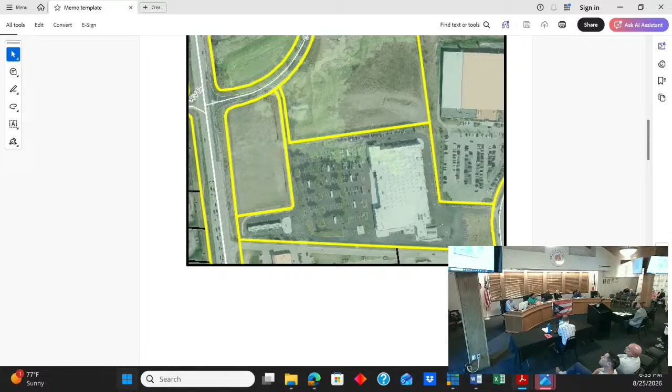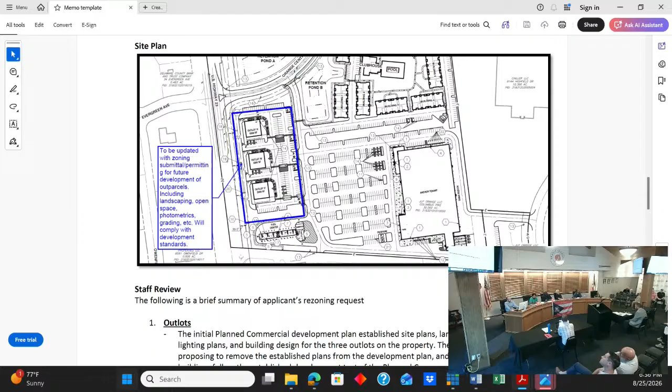And then the site plan provided by the applicant. You can see the BJ's Wholesale Club on the right side of the screen. The commercial outlots that we're discussing are highlighted there in blue. The initial planned commercial development plan, as approved, established site plans, landscaping plans, lighting plans, and building design for those 3 outlots on the property.

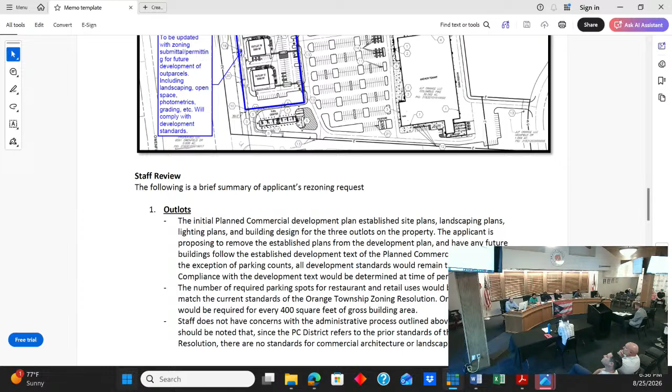The applicant is proposing to remove the established plans from the development plan and have any future buildings follow the established development text of the planned commercial district. With the exception of parking counts, all development standards would remain the same. It would just be removing the building designs which were submitted as pre-approved, basically allowing them to be flexible so they could be redesigned at the time of permit.

There is one change: the number of required parking spots for restaurant and retail uses would be updated to match the current standards of the Orange Township zoning resolution. They were different at the time this was initially approved in 2022. So the new parking count for the outparcels would be 1 parking space required for every 400 square feet of gross building area.

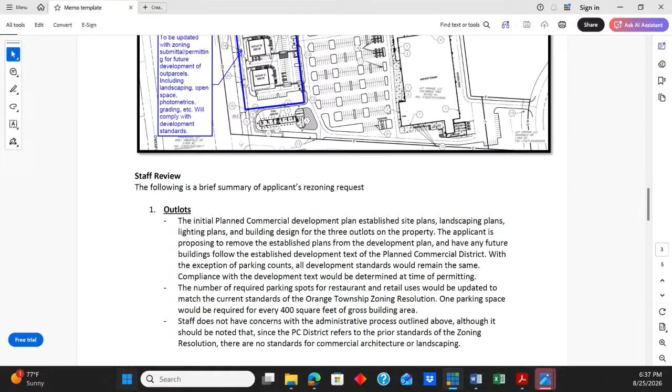Staff does not have concerns with the administrative process outlined above, although it should be noted that since the PC district refers to the prior standards of the zoning resolution, there would be no standards for the commercial architecture or landscaping. Lighting would be included in the planned commercial district, but the architecture and landscaping would not be governed by it.

The other aspect of the amendment application is for signage, so bear with me as there are some diagrams that show this maybe a little bit better than what my text allows. There's currently 1 monument sign existing on the site, which advertises BJ's Wholesale Club and the fuel station.

A divergence was granted at the time of rezoning in 2022 for that sign to be 10 feet in height instead of the standard 8 feet. 3 additional monument signs were approved at the time of rezoning for the 3 outlot parcels, but those signs have not been built since the outlots have not been developed. A divergence was granted at that time to allow multiple monument signs on the property.

In May of 2024, the Orange Township Board of Appeals approved variances for 2 directional signs on the site, allowing them to be 15 square feet in area and 6 feet in height. The applicant is proposing to alter the permitted signage on the site to allow for 2 new monument signs, meaning the current monument sign would be removed and the 3 proposed standalone outlot monument signs would be removed from the plan. So there's 1 existing, 3 proposed as it is currently. The revised plan would have 2 in total, removing the 1 that exists today.

One monument sign, labeled MS2 in the plans, would be located along the frontage of US 23 in a similar location to the currently existing monument sign, with encompass signage for 3 outlot parcels, as well as BJ's and the fuel station. That sign is proposed to be 20 feet in height, which would be a divergence from the zoning resolution, because the maximum permitted height for monument signs is 8 feet.

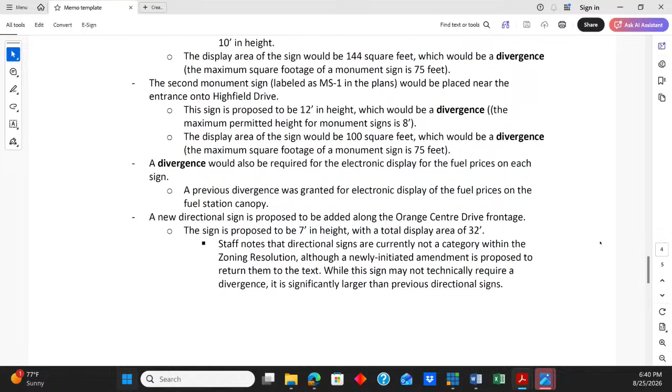One more sign is proposed—a new directional sign to be added along the Orange Centre Drive frontage. That sign is proposed to be 7 feet in height with a total display area of 32 square feet. We note that directional signs are not currently a category within the zoning resolution, though we may look to update that with future zoning amendments. While the sign may not technically require a divergence, it is significantly larger than previous directional signs.

You can see on the screen there—we have this graphic in a larger form we can put up in a minute. The sign on the left is the currently existing monument sign, 10 feet in height. The two in the center and right would be new construction.

The one in the center would be located near the entrance onto Highfield Drive, at 12 feet in height. MS2 on the right would be new construction proposed along US 23, at 20 feet high.

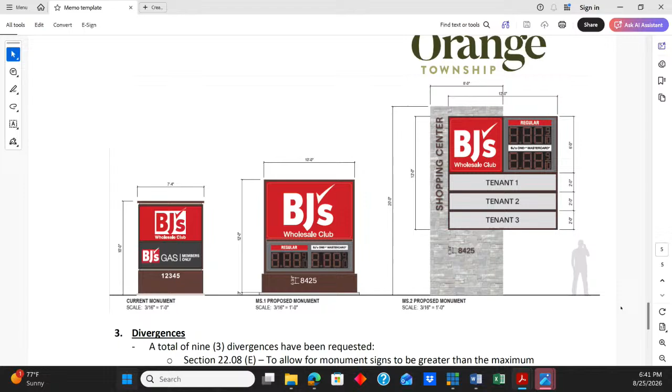So, a total of 3 divergences for the sign heights to allow for the monument signs to have larger display area, and then to permit the electronic display of fuel prices on the sign.

Because this is an amendment to an existing planned district, the Delaware County Regional Planning Commission is not required or requested to review this application. So this is the first and only hearing for this at the zoning commission level. This would then proceed to the township trustees.

That's all I have for the moment. With the applicants here, does the commission have any questions? Would you like to make a presentation about what your changes are?

Yeah, is this working? Yes. Okay, thank you for allowing me to come in and speak to you today about this development.

This is something that, as was mentioned—thank you for the staff's report—has been in development for a number of years, trying to get anchor tenants involved, which thankfully BJ's was able to come in and utilize this land. But there are some new faces here from when we came in a number of years ago, and I think it would be beneficial to talk through some of the hurdles that happened during that time.

Specifically, this land has sat vacant for decades. It was some of the last land located in that area, although it was pretty primed for development given the commercial corridors around it. You had Walmart and Giant Eagle, and you had Meijer, which has now been redeveloped into Floor & Decor. So there are a lot of other outparcels in that area, lots of commercial development, but this land sat vacant, and there are two reasons for that.

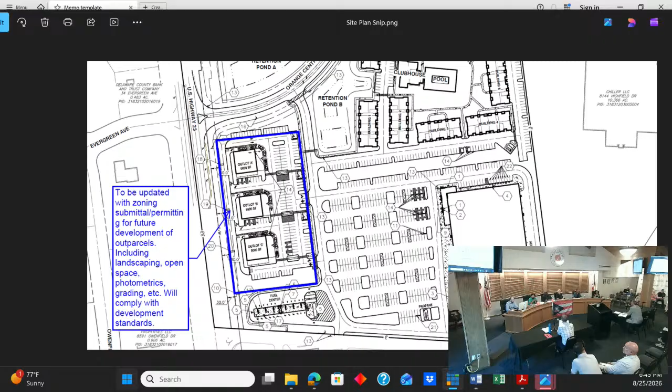The parking that they're requesting for the out parcel, when this was done through a mixed use overlay — there was an overlay district that happened, and I believe it has since gone away — that shoehorned and made this commercial property, which was always dedicated to be commercial, forced it to be mixed use. That's another reason why it hasn't been developed the way it should, because there's a multifamily component on there.

The developers have neglected to do that at this time because they don't feel it's in the best interest of the township. But respectfully, they went through and proceeded with zoning to help get everything approved appropriately. At the time, the parking for the commercial developments and out parcels was something where it was a little bit more of an archaic calculation.

Since post-COVID, as you may know, a lot of restaurants have gone to mobile ordering or mobile pickup, and a lot have gone through drive-throughs now, or just pickup where you don't even order, you just pick up through the drive-through. Our phones post-COVID have really changed things from a socially distant standpoint, and that's changed the whole industry.

With that, at this point in time, we believe, based upon the previous code for that parking, they're over-parked, and it would allow some greater flexibility for those out parcels to be developed, to bring in some new individuals who are not here currently in Orange Township, to help the community if we're able to change it. One of the changes we're asking for on that parking is to go to your current code — just to reduce it to current code so that it allows the flexibility.

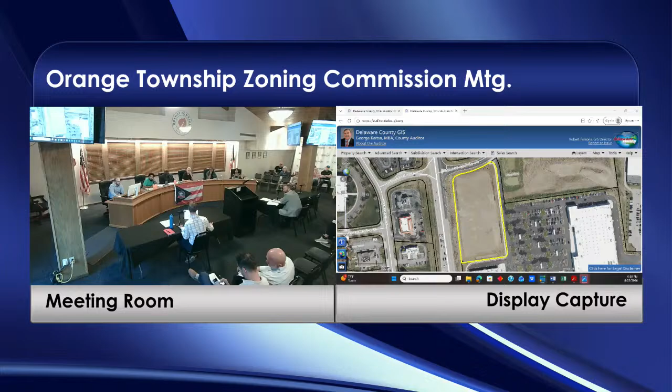Anytime a sign is installed, whether it's a wall sign or freestanding monument sign, it requires a zoning permit. So the zoning department would not approve a zoning permit for any signs that were not these. Right, if we approve this at 20 feet for these 3 out lots, that would be its only sign, no matter what happened. These other separate businesses couldn't apply for another sign because this is your sign.

Correct, and freestanding signs, they could have wall signs, right, on their freestanding sign—sorry, right. That could be restricted.

Correct, that's the plan. Now, there was a mention of, when you compare to the North Point Walmart freestanding sign, how does it compare? Eric, can you go to, it's the second to last page of the PDF?

I couldn't quite fit it in the staff report, but I haven't measured it myself—the applicant provided this measurement, which shows it at 40 feet. Those are shown to scale on that exhibit. You can see it's almost double what we're proposing.

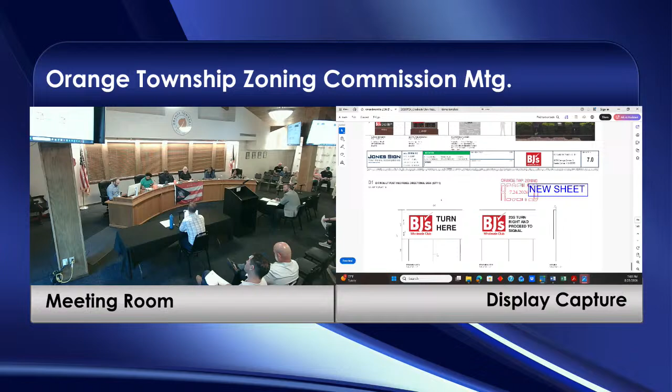To clarify, the directional sign would really not be viewable from 23 itself. Eric, can you pull up the site plan? If you see at the top of the screen where it says retention pond, it's closer to that area.

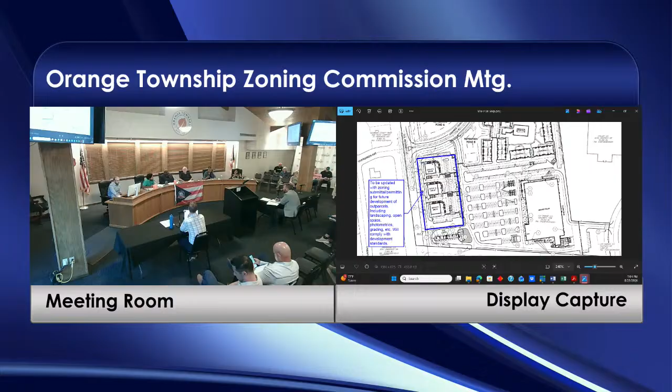We did note in the staff report there are existing directional signs there that have been granted variances in the past. I can imagine them wanting to use the sign they have on the road to direct people, and create one for that purpose. For the directional signs, yes, but currently the one on 23 is going to be torn down. That will be removed and replaced with the one we're proposing.

There have been directional signs installed that are much smaller, only a couple feet in width and height, so they're not very visible, particularly at the speed on 23. That's why we wanted another sign that was a little bit more visible to be seen at that speed.

Are you okay with the sign on Highfield making that our standard zoning, standard dimensions? Robin, are we able to propose that right now, to be able to make that a vote?

I think if the commission is leaning that way, we probably do want to open this up for public comment in case there are any comments from the public. If the commission wants to move that to 8 feet, I would recommend a resolution of approval with modifications, subject to the modification of that sign being reduced to 8 feet.

Put the directional on that. Yeah, so that's something the commission needs to at least have a majority on, regarding the directional. I'm fine with 8 foot, I'm fine with the big change. At the end of the day, you indicated the big change, the big sign, was to get everybody's attention, given that there's nowhere else to turn and no other way to get into the space.

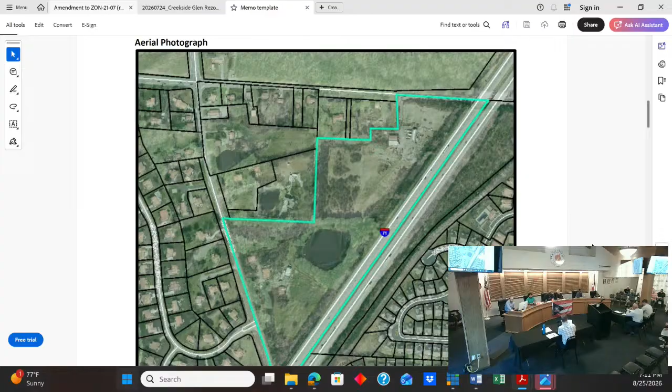In terms of the comprehensive plan, parcels in question are located in sub-area 10 of the 2011 land use plan, Planning Orange. Recommendation 11-3 states single-family infill remainder areas at 1 unit per acre without centralized sewer, or 2 units per acre with centralized sewer. Recommendation 11-4 reads to work with ODOT and the county engineer to secure the I-71 interchange at Big Walnut Road, while recommendation 11-5 reads to preserve the area around the interchange as non-commercial to preserve the flow of traffic.

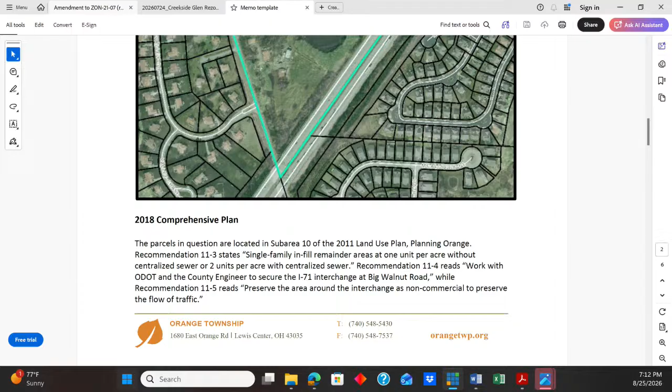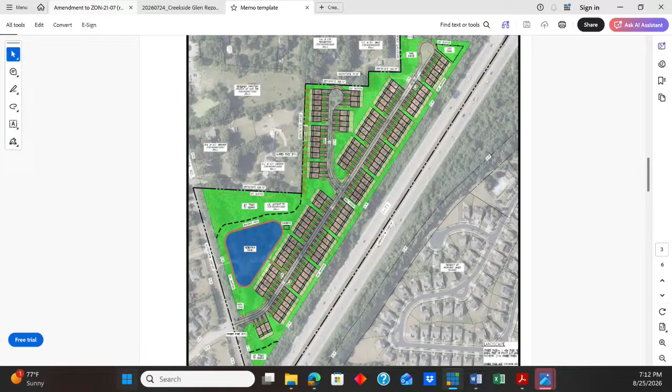Exhibit A is the site plan provided by the applicant. You have a larger version of this that we can show on the screen later. Just this one for now, specifically this landscaping plan with property showing the townhome lots as well as plans to be planted and open space.

In terms of density and unit count, again, proposed is for 118 townhomes. The gross density is 3.89 units per acre. This does comply with the PUD's maximum density of 6 units per acre for multifamily uses. The development is proposed to be completed in 3 phases: phase 1 would be 48 lots, phase 2 would be 34 lots, and phase 3 would be 36 lots. Open space area is listed as 10 acres, or roughly 33% of the property. The development text as proposed would require a total of 30% open space.

The lot standards would be as follows. This, as we read it, is meant to be a platted subdivision, so each townhome would be on its own individually platted lot. The lots have a minimum lot area of 2,800 square feet, minimum lot width of 28 feet, minimum lot depth of 100 feet. Building setbacks for those lots would be a front setback of 25 feet, side setback 0 feet whenever the units are sharing walls, and then 20 feet between the buildings or clusters. Minimum rear setback on lots would be 20 feet. Maximum building height is 35 feet, which is compliant with section 10.01E4 of the zoning resolution, requiring a maximum of 35 feet height for all residential units.

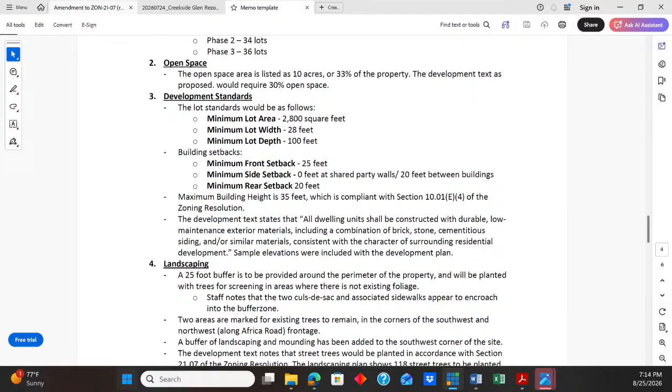The development text states that all dwelling units shall be constructed with durable, low-maintenance exterior materials, including a combination of brick, stone, cementitious siding, and similar materials, consistent with the character of surrounding residential development. The applicant did provide sample elevations in the development.

In terms of landscaping, there is a 25-foot buffer to be provided around the perimeter of the property, with trees for screening in areas where there is non-existent foliage. We did note that 2 of the cul-de-sacs and associated sidewalks appear to encroach into the buffer zone, so that is something to be aware of and perhaps address in potential revisions.

Two areas are marked on the landscaping plan for existing trees to remain, principally in the southwest and northwest corners along Africa Road. A buffer of landscaping and mounding has been added to the southwest corner of the site.

The development text does note that street trees would be planted in accordance with section 21.07 of the zoning resolution, which requires street trees—we call them street trees, but they're technically on private property outside of any public right of way. The landscaping plan shows 118 street trees to be planted: Armstrong maple, trident maple, hedge maple, and American hornbeam trees, with buffer trees in the 25-foot buffer zone including Norway spruce, Colorado blue spruce, and Serbian spruce.

In terms of amenities, a dog park is shown on the development plan in the northeast corner of the site, as well as a pavilion, retention basin, and a walking path around the basin itself. There are also 2 mail kiosks shown along the streets, one on the east side of the proposed public road and one on the west side of the northeastern cul-de-sac.

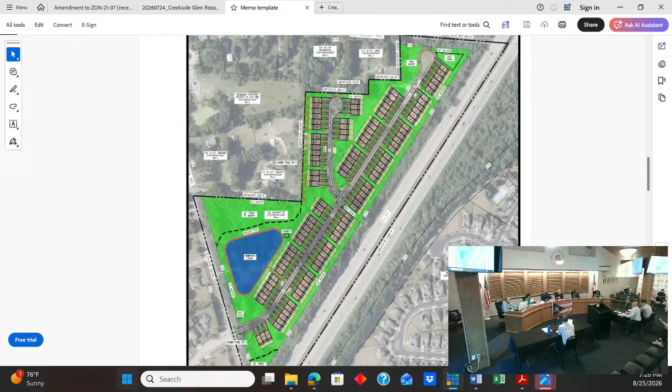We would generally amenize a community, yes, so that would be included in our full plan that goes to the council.

And Robin, just curious, I know you said this path is not within our jurisdiction - where does that rest? Our recommendation would be to have an easement for a future path along the Africa Road frontage on the southwest side there. The Orange Township Active Transportation Plan does also recommend, long-term, a path along Big Walnut Road on the north, but our understanding is that the path would be on the north side of the road, not the south side.

So you said 2-car garage for 3-bedroom? Yes, and the pricing is a starting price of around 400. I would believe that's the proper number, yes, 400 or 500s.

And this meets all the other standards with respect to the mailbox - they've got postal access for everybody. Does this have a clubhouse for the community? There's not a clubhouse in this particular community. The amenity was briefly addressed - we certainly can talk about that and go from there.

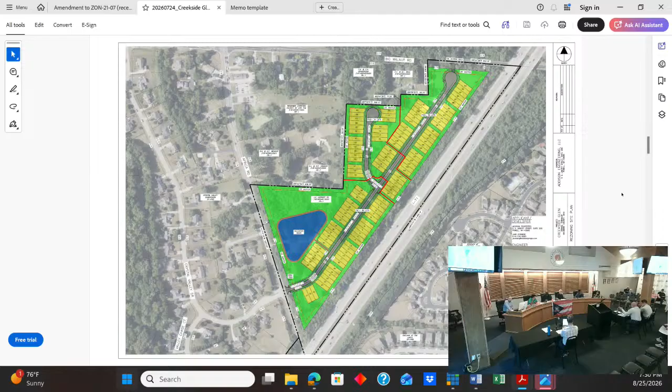It takes a long time to grow trees. Mr. Leppert, we have time to walk this property, but we planted all these pines in 1956. They've been in the ground a long time, so we want to preserve as much legacy as possible.

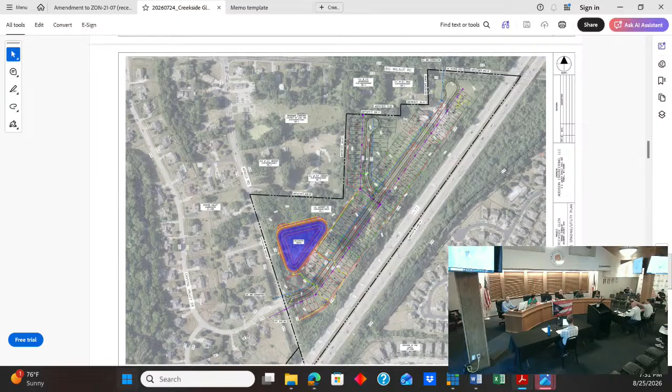My last question is on the retention pond. Did you say it's subject to move? The retention pond, if you see where it is now, it's in a different spot. It's not the first time we've done it, but for drainage purposes it would be relocated. Where it is on the site plan is the new location. Where it is now, if you looked at an aerial photo, it's in a different spot.

As Robin mentioned, the Regional Planning Commission is going to decide if it's doable or not, so we don't want to discuss that. From an engineering standpoint it is doable, but we just go by what the Regional Planning Commission decides on that.

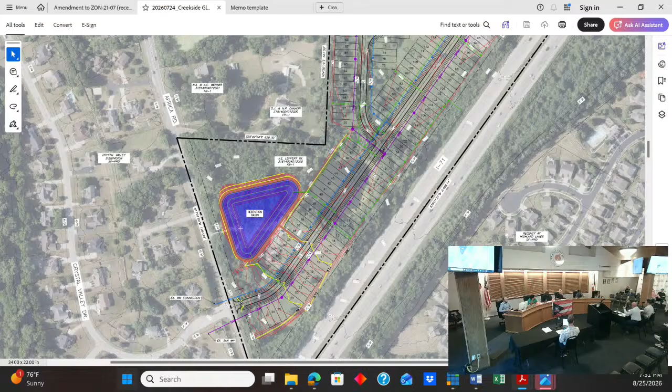So I understand this pricing starts from 400 to 500, that's the starting price you said, am I clear on that? The starting price would be in the 400s, and depending on options, because as you build these, there are options as far as what kind of materials folks would finish with.

Because when these are built, most of them are purchased ahead of time, so folks have the ability to design and say I like the granite, or I like the new quartz, or I like a solid surface here. So the base plan, the base price, let me put it that way - the base price is like 400,000, right? I would think it's somewhere around there, but please don't hold me to the exact numbers.

What I'm trying to say here is it's a 3-bedroom home, typically 2-car attached. I'm trying to see the intention - I understand we can't suggest them anything, but I also have a responsibility to understand, like the 3-bedroom and 2-car attached. If the intention is to provide a single family home feeling, I don't comment, but that's what I'm trying to understand myself, because tomorrow when we put all the points together, I have a responsibility to think of everything.

Typically it comes down to what it's doing for the residents, or what our goal is - trying to make it easier for people to live here, things like that. I think we're taking a unique parcel adjacent to a freeway that most likely will not have $700,000-$800,000 homes on it. I know some multifamily was proposed earlier with higher density. What we're doing is creating - I don't want to go down the rabbit hole of talking attainability and affordability - we're creating a quality community that still addresses the needs of a family, for instance.

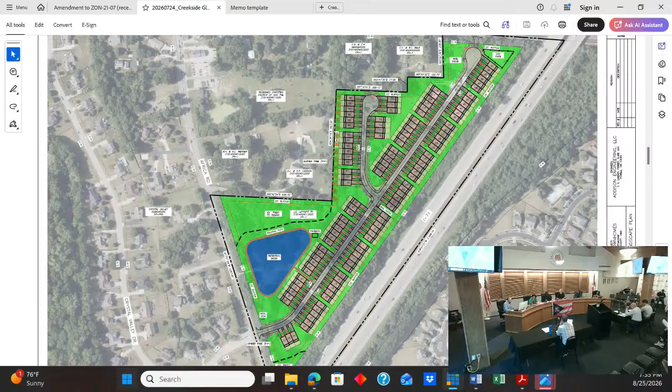No, there's no prescriptive distance. In general, those types of things are more market driven, assuming people don't want to buy a dwelling unit, attached or detached, that's 20 feet from a major highway.

Certainly, a lot of railroads and freeways run through Delaware County. Lewis Center is unique, right? There's a lot of railroad crossings and homes all around there. If you look at what's around there, up and down 71, some are closer, some are further in proximity, but a lot of that has to do with topography as well.

There's a lot of mature trees on this side, and this is almost in a secluded ravine. I've lived here for a very long time. I've driven past this, I've hiked the dam, I've ridden my mountain bike here. I never knew that was here, and I've driven past it many times.

It's kind of big back there. And I think that's also unique because, as you see coming off of Africa Road, there's a lot of space between the pond and the green space. Folks from Crystal Valley are going to see that back there. It's almost hidden.

Let's open up to any questions or concerns. I've got a few ground rules. Number 1, keep it to 3 minutes. Number 2, give your name and address. And number 3, most important since there's so many people, if your concern's already been said, I don't mind you coming up and saying, hey, I agree with that, so you can register whatever opposition you may have. That's all good. But we'd like to keep it somewhat concise.

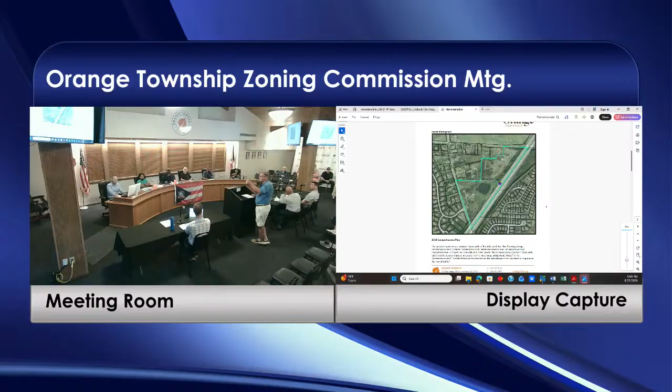No, keep going. You had it north, south, east, west, when you delineated what the properties and developments were around here, right there. I think we should look at this. I don't see any high-density housing listed anywhere around this proposed development. This is a terrible, terrible use of the land. What is it currently zoned? And how many homes per acre?

It's a one acre lot. I'm asking the commission, why are each of you agreeing to change that zoning? I want each of you to be able to speak clearly to the residents here who you represent, why you think this is a good idea. Have a voting commission, I understand that. So I understand nobody needs to answer that question for you. Once you vote, should you vote, I would like each of you after your vote to explain your vote and why you would agree to that.

The other thing is, I hear all these questions, traffic, stormwater. I hear all these questions, and all I hear is, well, we don't have an answer for that yet. We're waiting for information. If we're waiting for information, why are we here tonight? This should be tabled until all the information is available. To vote on anything without an answer is irresponsible. It is absolutely irresponsible. So why would you put this forward? Why you put this forward before you have the answer is beyond me. Please explain that to me.

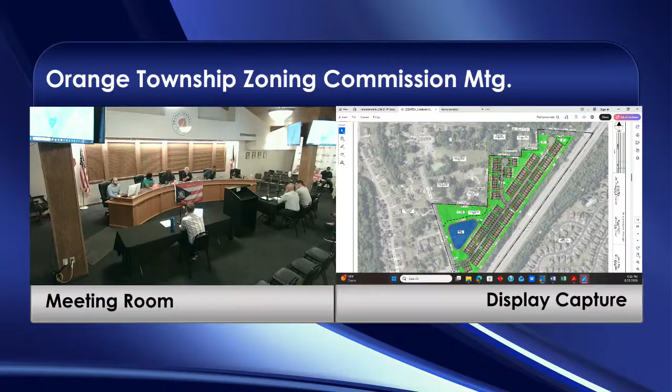So it sounds like we'll have the major. All we can make sure is that they have all the information available by the 8th. Everybody's good with that. And I presume if that slips, will they be able to? So if the commission sets the hearing for the time, date, and place certain on the 8th, then we do need to meet as a commission on the 8th, even if he's not ready. Okay, so you're comfortable with the 8th? I just want to go with that again.

Based on his comments and what seems like common sense, does it make sense to push it two weeks from the 8th to ensure you've got every single piece of information you need? That's what we've already declared. We have everything we need by the 8th, and we do. You do? Yeah, we will. I mean, if we don't have the results from the fire department or the Regional Planning Commission, Mr. Robin could take action based on that, and he would propose a new date.

So we're not going to do anything until we get the... We have to meet on the date, and we said we're going to have a date. Go ahead, Mr. Chairman. Everybody's already assured us that we can have the information we need by the 8th, so we're going to act on that. Yes, could something happen out of the blue? Of course, but we're always assured that we can have what we need by the 8th.